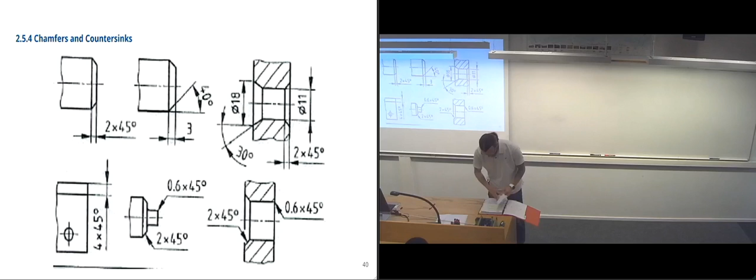So we left off with radii and diameters. We're going to continue on with chamfers and countersinks. Just got to find my place here in my notes. So there it is.

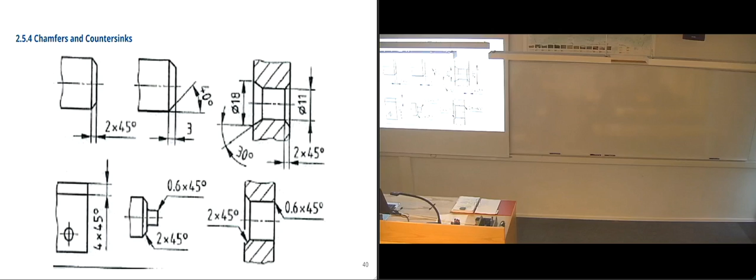Chamfers and countersinks. I'm not sure if you've heard these expressions before. Really, it just means you have made an angle on what would otherwise be a 90-degree angle. You have cut it so it's at a different angle. This means that, especially for smaller chamfers like this one, 0.6 millimeters times 45 degrees, what you are gaining by doing that is basically that you won't cut your fingers when handling it. Because a 90-degree angle on steel is going to be really sharp when machined. So often when machining, you will put in these small angles, or put a note in the drawing.

Break all sharp edges with a chamfer of maybe 0.2 times 45. That was what we used in Imenco, which was really nice, because if there was a 90-degree edge and we hadn't put in a specific chamfer for that edge, the guys manufacturing it would see the note and say, well, this one is going to have a 0.2 anyway. So they always did it.

When you have a 0.2, it is often more than enough to just use grinding paper or sandpaper to create the edge. So it's often a manual task. If it's a large one like this, 2 millimeters times 45, then it's turned. If it's in a lathe, it's turned with tools and machinery, or if it's in a mill, the mill will fix it. For the really small ones, it's often enough to just grind it a little bit to get that sharpness away from the edge.

When it's flush, then it will be... if we use red here to show the steel, the material will come up here, so that the top of the bolt will become the same level as the top of the material. Usually when you have a bolt, you have one with a hexagonal head, or maybe a round head, and then you will have the bolt head up here.

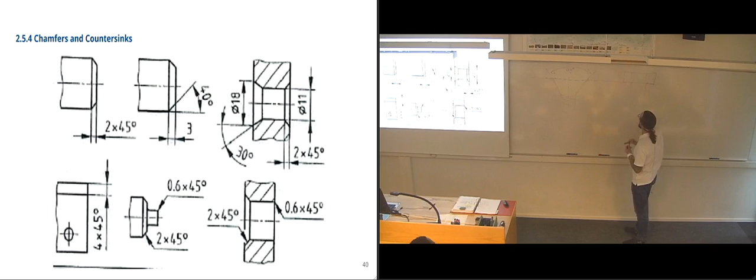Which means that in this case you will be able to slide something past here if there's supposed to be some movement. Whilst in this case it will stop because it will hit the bolt head, and you will either block your movement, or if the movement is strong enough, it will just tear the bolt head straight off.

So that's a very nice feature with the countersunk stuff. Also, for decorative purposes, if you're putting naming plates on a piece of equipment, with maybe some additional information like a workload limit stamped on the plate, it will make a much nicer plate if you use countersunk screws instead of ones that protrude out of the nameplate. It just looks much nicer when you're creating it.

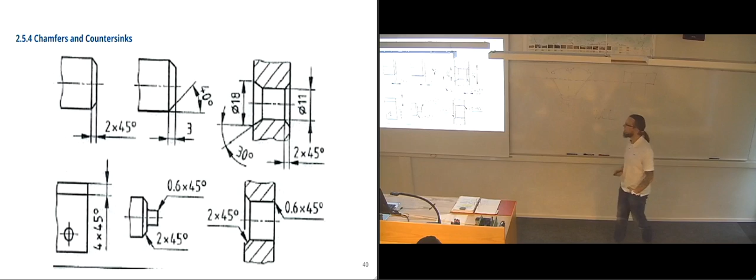Sometimes on cylinders you will have squares and flats, so you'll have a cylindrical shaft, but at the end of it you're supposed to connect it to something square. Maybe it's something that needs to turn, so it needs something to grip it on. So you will have these squares at the end in order to have something to grip onto the cylinder.

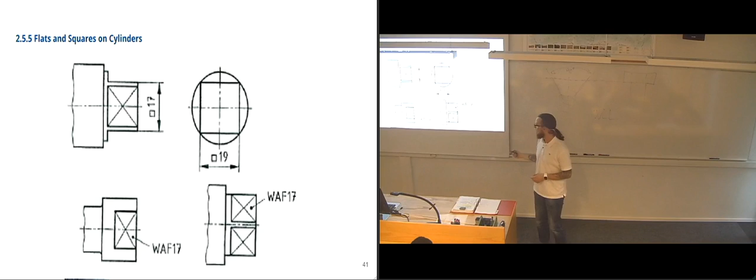You can also show it using width across flats, basically WAF. This shows that the entire flat area, which has these diagonals, will be 17 millimeters across. So it's a nice way of showing it.

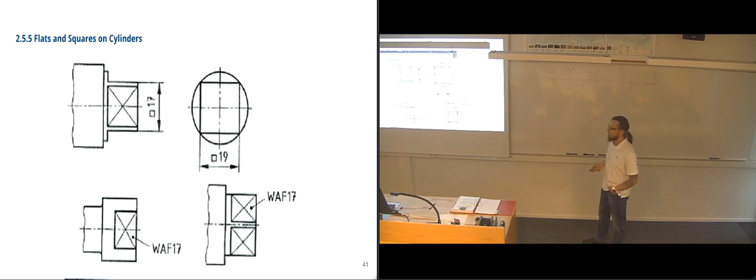I haven't really designed anything using squares, mainly because I haven't done much with rotating shafts. My personal experience is that usually you either use threads or some sort of spline method instead of these, but you might end up with them, so it's nice to know there's a way of drawing them.

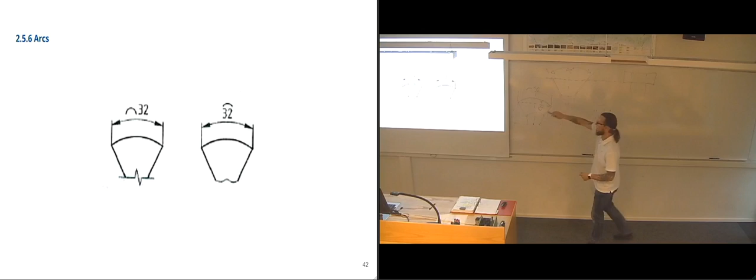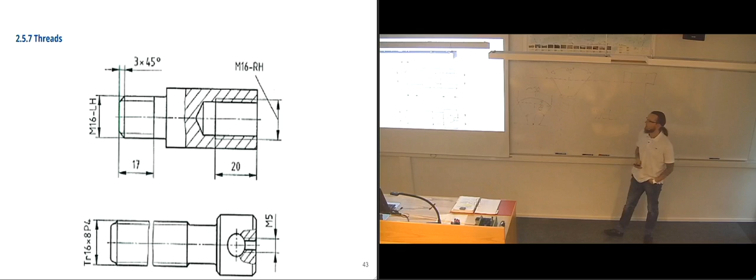And then we have threads, which is really important for mechanical engineers, because usually when you're making stuff stick together, you're either welding it or using threads so you can bolt it together. So threads are something very important to get correctly in drawings, just to be sure that the bolt you've designed to fit will actually fit. That's sometimes a huge problem.

I've seen a lot of different design errors done by colleagues and even myself, just because you've been in a hurry and haven't really thought it through. Then something seems good enough, but there was something you didn't think about. For example, if you just specify that a hole is to be 20 millimeters deep, instead of saying that the threaded part is 20 millimeters deep, and the hole itself is supposed to be even deeper.

What can end up happening is that when they create threads in holes, they don't manage to get the threads all the way in. Let me try to draw this. So you have the bottom of the hole, and this is the point of the drill when you're drilling it in. The drill has a certain angle when it's going in, so that's the bottom of the hole. From this line on, it will have the same diameter all the way.

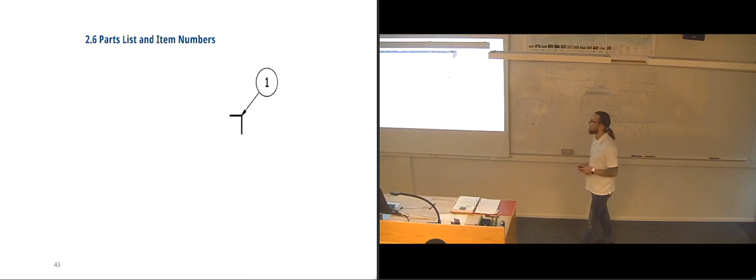He will take you through the different kinds of threads. But we'll also look a bit at the design, and when we get into Inventor, I'll show you how it works with the spiraling groove and everything. I think it's a nice complement to what he's doing, drawing everything on the whiteboard, which can get confusing with a lot of threads. If I can, I'll get him to tell me when you're doing threads in your lectures, and I'll supplement it in the CAD lectures.

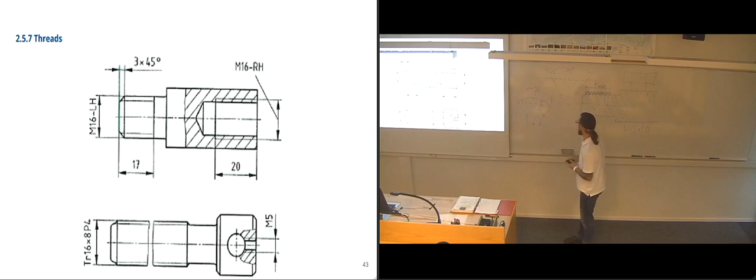I'm actually going to show you the 3D models and how it looks, so it's a bit easier to get a feeling of what's happening, because it's difficult to get across on a whiteboard. I know, because I tried to do it with the Norwegian students this spring, and it was really hard to get it across.

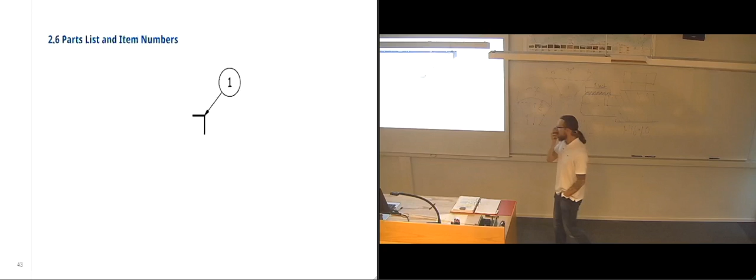In the drawings, we're not only drawing one part on each drawing. When you're creating a production drawing for a specific part, it's only that part in the drawing, because that's the drawing they are going to look at when they produce it.

But once you've created all the individual parts, you're going to assemble them together. A mechanic or technician needs a sort of guide, so you create an assembly drawing with all the parts assembled together, shown by item numbers.

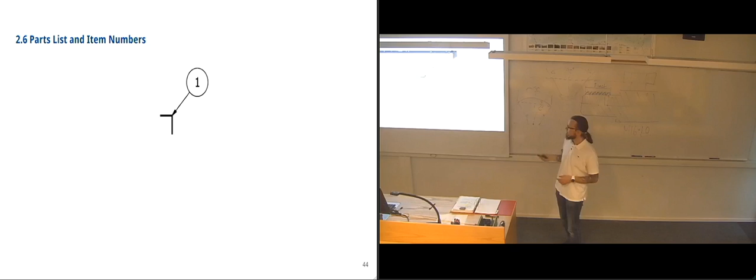You create balloons that point to each individual part, and the number in the balloon corresponds to the item number on a parts list, which you also add into the drawing, usually on top of the title block. So you have the sheet, the title block in the corner, and you add the parts list above it, gathering all your text in one corner.

The parts list usually has the item number, corresponding to the balloon in the drawing, and a quantity, so it's only necessary to put the balloon on one item, unless it's a cluttered drawing where it might be necessary to put balloons on several to avoid confusion. It should only be necessary to put one balloon per item, because you have a quantity showing how many there are. For example, if you have 16 bolts fastening something, you'd have item 1 pointing to one bolt, with quantity 16.

Then you'd see the pattern of the bolts, so you'd know - you could even count them - yeah, there are 16 bolts, so all of these are supposed to be that bolt. But the problem is, if you have 16 of one kind of bolt, 4 of another, and 12 of another, and they're all fairly similar in size and look similar in the drawing, then it might be nice to put more balloons, or one balloon with several arrows pointing to several bolts, just to make it clearer what's going on.

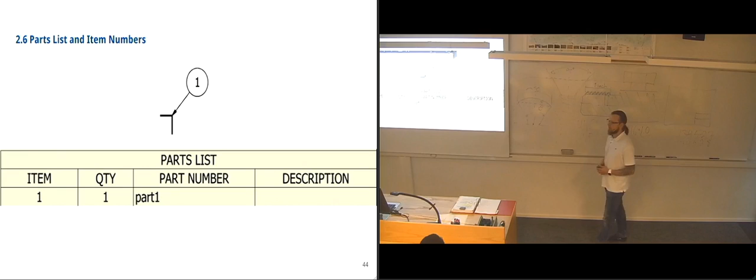So you have several ways of doing these part numbers, but it's very common to have it in that parts list. And then usually you also have a description - is it an M16 bolt? Is it a flange? Is it whatever it is? There's a description, the word or name of the item, which describes it.

The medium also gives for radii and chamfers, and it also gives for angles, how many degrees - actually, it gives it in degrees and minutes. And minutes is the sort of decimal point for degrees. I'm not sure how familiar you are with it, but degrees go in the same system as the clock does, in 60, counting in 60 all the time. That's why you have 360 degrees in a complete circle.

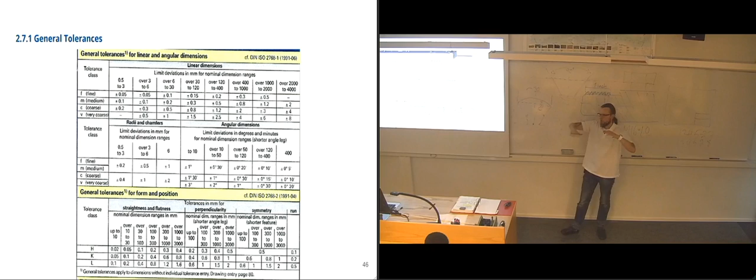So straightness and flatness is basically how straight and flat something should be. Could there be a slight curve in it? For an example, if you have been milling something, that's a really rough way of machining it. Let's say you're on an old milling machine, so it's got some give to it.

It's not completely reliable when it comes to dimensions yet. So maybe as it was moving across the workpiece, it would have a dip, so that in the middle of the workpiece you would have a slight curve, and then it would go back to the flatness of the original one. So then you can go in here and see.

For K here, you would have different values. You have the dimension range in millimeters, how far it is, and then you can see how much it is allowed to deviate. So the deviation would be, it was supposed to mill it like this, but it ended up milling it like this. The deviation would be the top point, just to see how much is allowed to deviate there.

The same with perpendicularity. It's 90 degrees. How perpendicular is this when you are looking at it? Is it within or above the tolerances given?

And what you actually do is measure on the shorter leg of the angle. So if I have a part, I've got a long leg of the angle here, and I've got a short leg here. And it's supposed to be 90 degrees in here.

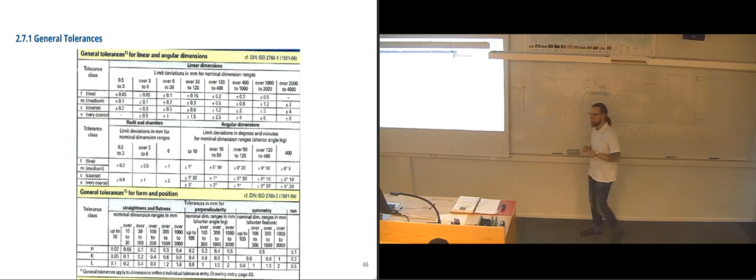It's an easier way of measuring it than actually measuring a 90 degree angle. Because if you're measuring it in how many degrees of an angle you have, it can be quite difficult, especially if you are doing it on small objects. The longer legs you have on the angle, the easier it will be to measure exact degrees on an angle. As soon as it starts becoming really small, it's harder to actually measure that.

You have 250 millimeters here, so if you continue this line up here, you were supposed to have 250 millimeters there also. So it's actually easier to measure the deviation in millimeters instead.

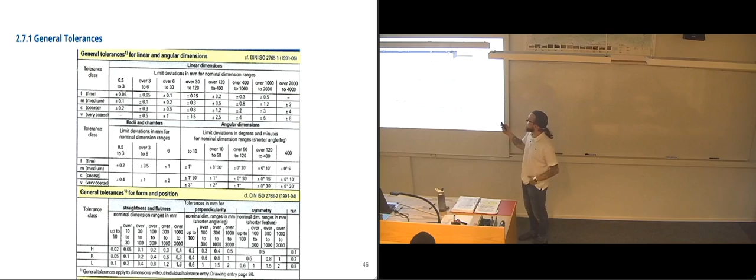So we've been looking at general tolerances that can be given. The thing is, if you refer your drawing to this ISO and you set it, for an example, medium and K, just to give the worker something to look at, then you don't need to put these tolerances into the dimensions in the drawing. If it is a 150 millimeter dimension, you don't need to put plus minus 0.5 behind it, because you have already referred to medium in this one. Everything that doesn't have a specific tolerance given will be referred to this one.

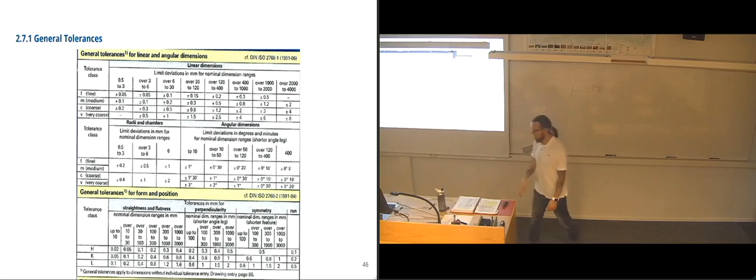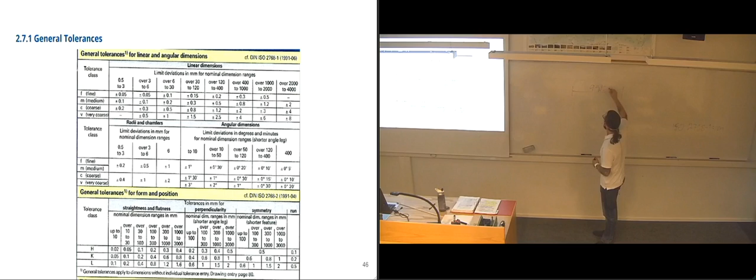So whoever is producing it will then look, maybe you have a length of 990 millimeters in your part, you have nothing behind it. So then the guy knows that you have, for example, in a note down here, written ISO 2768-1 and medium. So he will know that, well, 990 is below 1,000, so it's in here, so that is plus minus 0.8. So then he knows that it is plus minus 0.8 on this one.

So you don't actually have to put it in on every dimension, because putting in tolerances is a manual operation. After you put the dimension up, then you have to go in and put the tolerance in place. So if you can avoid putting tolerances on most of your dimensions, it is a lot better to just use referrals to a specific standard and a specific tolerance class, because then you don't have to do this on everyone.

However, if most of your drawing is supposed to be medium, but this specific dimension you would want to be fine instead, then you would have to go in manually, and you would put, let us see, plus minus 0.3. So then you would actually put in plus minus 0.3 in it. Because you are referring to medium, and medium would be plus minus 0.8, but for this specific dimension, you need something tighter, so you put in 0.3 in it.

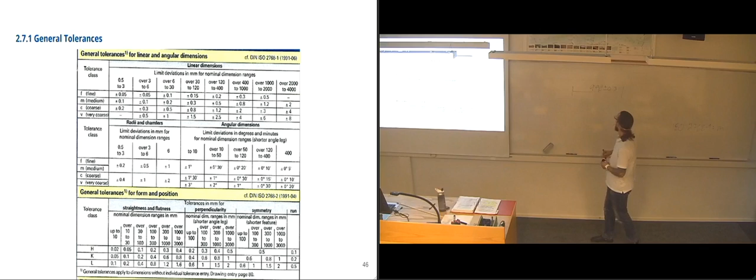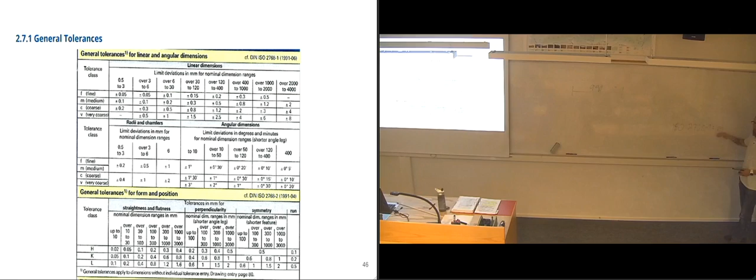One other possibility is that you can shift the tolerances, so instead of having a plus-minus range allowing 0.3 below and 0.3 above, you can shift it to be completely positive. So even though the medium tolerance here is plus-minus 0.8, you might want it on the positive side. So you'd set it as 0 plus 1.6, keeping the same range from minus 0.8 to plus 0.8, which is 1.6, but now going from 0 to 1.6 instead. You've shifted it so it can't be anything less than the nominal value. That's another way of using tolerances.

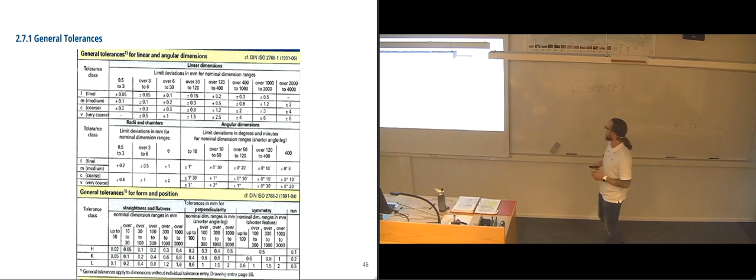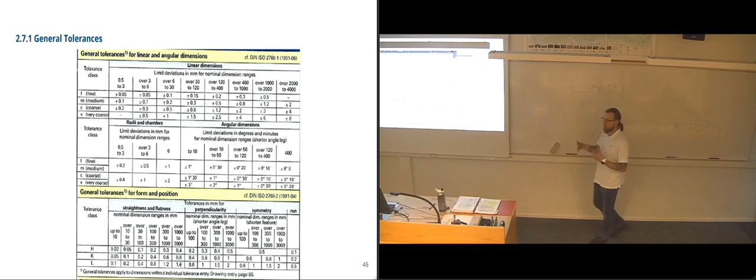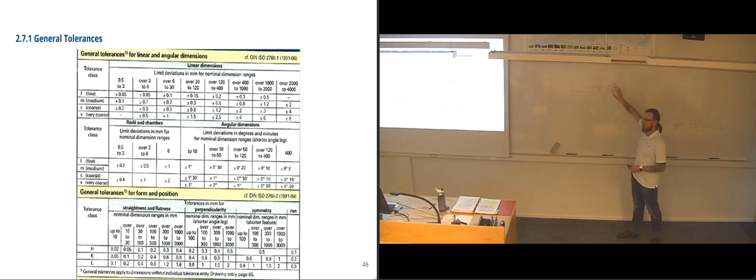Using tolerances is something that comes with experience, really. I'll try to incorporate it into the practice test we're using, showing how it's possible to use tolerances. But the real learning happens when you start designing on your own and realize you have to do something with the tolerance here to avoid a collision when creating it.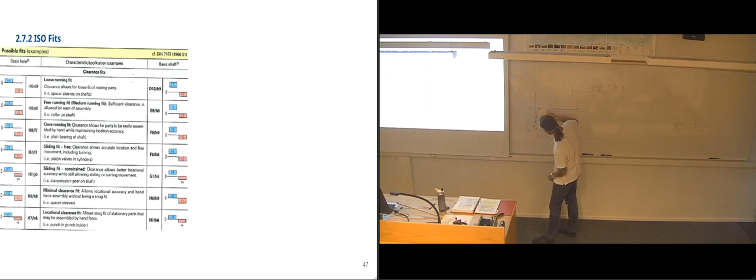Now for the shaft, let's see if I have a better red one here. The shaft is supposed to be inside here, and you can clearly see from the figure that it's far below—it's been shifted quite a bit down. So it goes from minus 0.025 to minus 0.050. So it can be quite a bit smaller than the hole in this case.

Instead of having to do all these dimensions and tolerances, going into tables and figuring out exactly what it is, writing in all these numbers, we can just put in the nominal dimension we're supposed to have, 30 millimeters in diameter, and designate F7 on it. That will automatically give it this tolerance, and the same goes for the hole.

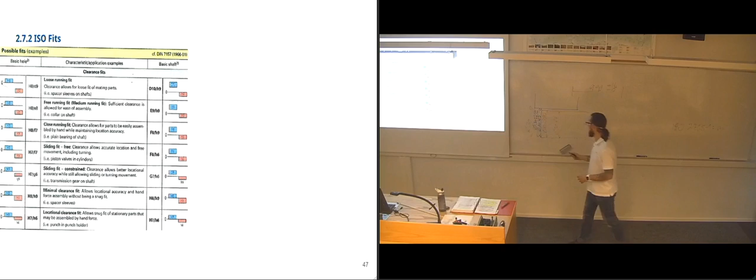30 millimeters, and we designated H7 there. Just write in H7, and then we get the correct one. Whoever is manufacturing it will have these tables with the corresponding tolerances for F7 and H7 and everything. They will have that with them in the workshop. So it's completely fair to just write 30 F7 on it. That's not a problem at all.

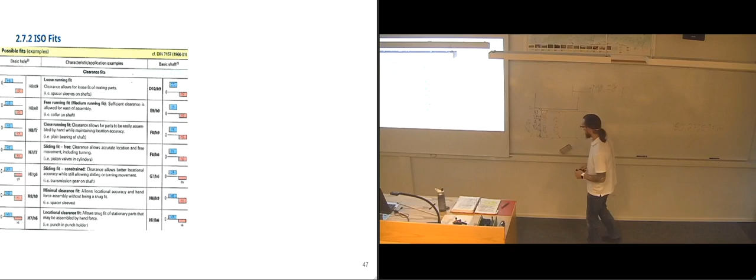What you can do, I'll show you later on in Inventor, is designate F7 as the tolerance, but you can also click the option that it's actually going to show the tolerance, so that you don't have to figure out the tolerance yourself. You just put in the F7, and Inventor will add what the exact tolerance will be and put it in for you in the drawing. That's one of the nice automation parts in Inventor.

The ISO fits are used because this first part, as it says up here, is clearance fits. Like this one, you are going to have air between the shaft and the wall of the hole, so that it's going to slide very easily inside there. There's not going to be any problems getting the shaft inside. When the tolerances are fairly tight, so if you have the minimal clearance fit, they can actually be touching on both sides. But you will still be able to slide it in if it's been manufactured correctly.

And then you have these transition fits. The clearance fits are mainly used if you have a movable part. If this shaft is going to rotate, then you usually use a clearance fit in some way. And then you also have the transition fits, which is sort of a cross - it's starting to be a collision between them, so they're starting to have a bit of trouble. Maybe you will have to use a hydraulic press to actually push the shaft into the hole, or maybe you will use the old-fashioned way with a sledgehammer, and just tap it in until you get it inside.

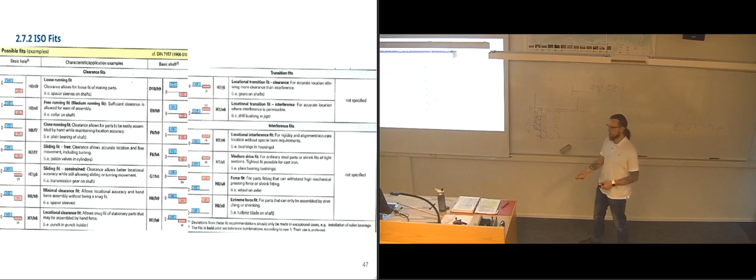In the car industry, what we usually did was that we had a CO2 tank under pressure, and when you release that, it gets really cold. So we just sprayed it with CO2 until it got cold enough. There was a lot of frost forming on the shaft and everything, and you had to have gloves to touch it, or else your skin would stick to the metal.

So when you get that cold, about minus 30, minus 40 degrees Celsius, then you had actually shrunk it enough that you could fit it inside the hole. And when it returned to room temperature, it would expand, and then it would be completely stuck inside the hole - you couldn't budge it at all. You would have to cool it down again if you were going to get it out. So that's a good way of getting them stuck without using welding or anything like that.

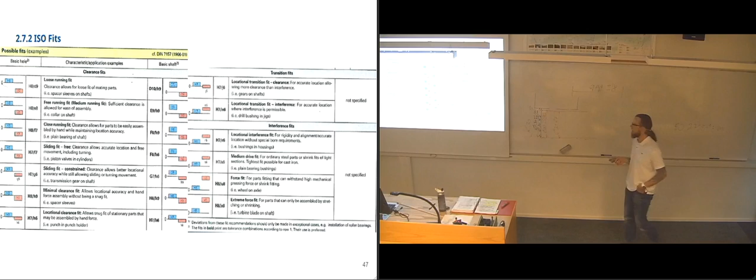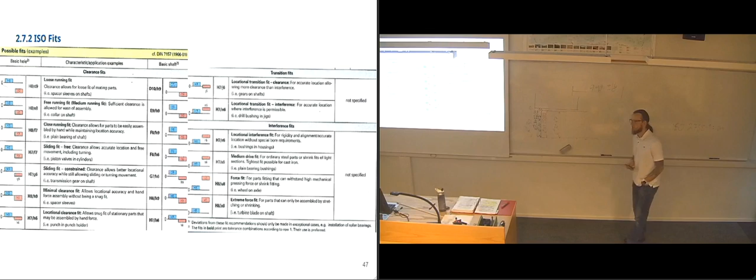It's something that's fairly much in use in the car industry. I haven't seen it much used in the subsea industry, but I haven't seen all of the subsea industry by far, so it might very well be areas where they use it.

And what you use the geometrical ones for is basically making stuff stay in place, not just by giving a dimension, but also by telling it to be, for example, concentric. If you have a hole...

If you have a shaft that's supposed to have a hole in the end, it's supposed to be exactly in center here, going fairly deep in, along the axis of the cylinder, and it's very important that it's exactly on there. You can use geometrical tolerances to state the importance of this. Because if you don't use a specific geometrical tolerance, it will be as exact as the machine can get it with the settings used to achieve all of the other tolerances.

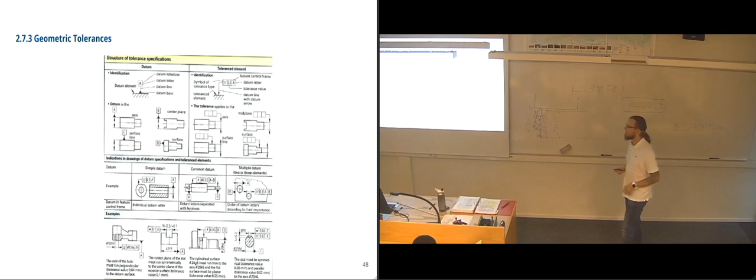Here are just some short examples. Like if you want two surfaces to be parallel. Perpendicularity, that they are exactly 90 degrees, or as exact as you can get it. Cylindricity you can show. Concentricity, that they have the same center line. Cylindricity, that it is actually a cylinder all the way through, that it hasn't been twisted along the way. Symmetry, that you have perfect symmetry around it, more than just using a symmetry line as we looked at yesterday. You would actually specify that this has to be really perfect symmetry, or as perfect as you can get it.

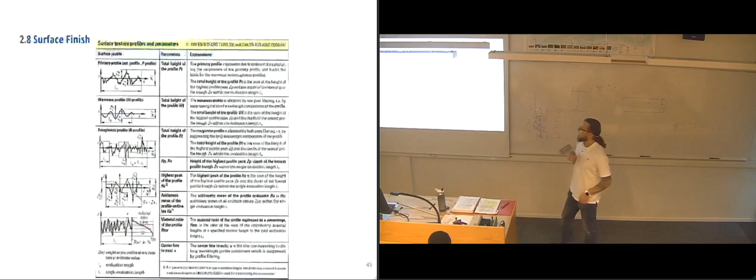Yeah, those are just a few quick examples. There are many of these tolerances that can be set.

And to my experience, most engineers that use them in their drawings manage to use them incorrectly. So they haven't really done their homework. They haven't read how they are supposed to use these symbols correctly, so when they put them on the drawing, they are putting them as they think they are supposed to be, but they haven't really confirmed it by reading the theory on how it's supposed to be used.

So if you end up in a situation where you think you need to use a geometrical tolerance, I would highly recommend that you sit down, take half an hour or so, and read up on this to refresh your memory on how a geometrical tolerance works exactly, how you're supposed to put it into your drawing, the symbols and everything, where they're supposed to be placed, in order to get it correctly. Because this is something you fairly seldom use, so every time you use it, it's useful to refresh your memory.

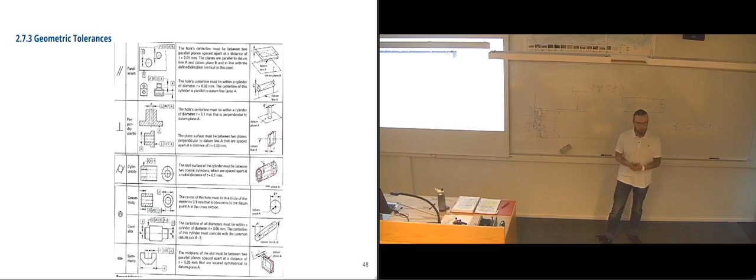Surface finish. When you're machining materials, you won't get a completely flat surface. If you go down to the microscopic level, it will look more or less like this, with valleys and peaks and everything, if you do a cut through it and put the microscope to the edge of it.

This is because, like if you are in a lathe turning a cylinder, the material is turning around like this, and you have a cutting tool moving along it, so it will cut a spiral groove all the way. But the blade isn't completely flat, if you look at the blade from the top, it looks more or less like this, with a rounded tip, so it will create spiral grooves that look almost like that along the entire length of the tool.

If you decrease the speed at which the tool is moving, you will of course create smaller and smaller grooves. So if you specify a very fine finish on your material, it means all of the tools used to create it have to move very slowly, so it will take a lot of time to achieve the surface you have specified.

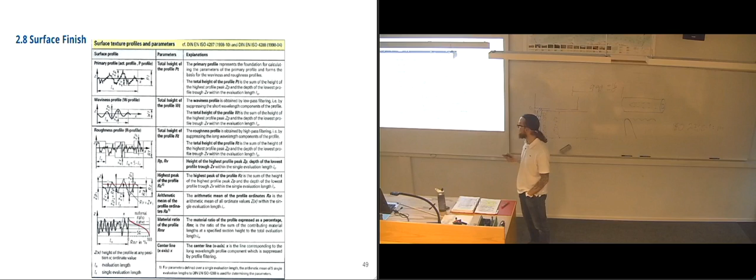One of the ways of specifying it on the drawing is to use the highest peak of the profile, or the arithmetic mean of the profile - RZ or RA. The RZ, which is the highest peak, simply designates the maximum height allowed between the mountain tops and valleys you have - the maximum difference in height. The arithmetic mean is basically just the mean value of the height of all the tops.

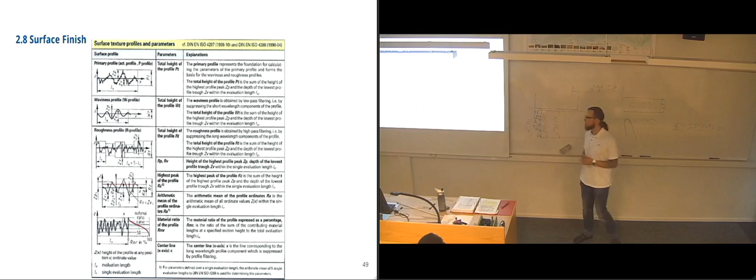Some people prefer using RZ, some prefer RA. It's not a huge problem, because you will be giving different numbers for them. It is a problem if you start to confuse them - you give the numbers for RA but have written RZ in front of it, because then you will have something completely different from what you intended. So long as you are consistent in what you're using, that's the best way of doing it.

The way we show surface finish is that we draw these symbols, which we have up here. There are 4 basic kinds of surface finish symbols, and the very basic one is this. This tip here is supposed to be in contact with the surface that you're specifying, but sometimes that's not quite possible, so you can also use an arrow to specify it.

The first one, which is completely open, means that all manufacturing processes are allowed. So it means you don't really care how they achieve the surface finish, so long as they deliver the correct surface finish. It's not your problem how they do it.

Sometimes you need them to remove material, so that even though the material is within the correct tolerance, they still have to remove a thin layer from it. This is often used, for example, with a huge steel plate you have bought to have a thickness of 5 millimeters, and you have also designated on the drawing that it's supposed to be 5 millimeters, but then you will have the surface finish coming directly from the mill, where they have treated it and created it - so you won't have a machined surface finish on it. So you can designate that they are going to remove material and have a specific surface finish on it, because then you will get a nicer surface. Even though the dimension is correct, they still have to run their milling machine across it.

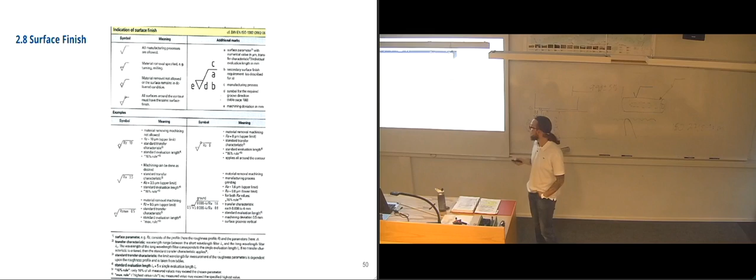So here you can see it can be as easy as doing one of these two. You just put in RZ and the value behind, or RA and the value behind. It can be that easy to designate it, and that's what's mostly being done. Or if you're doing something really special, you can start adding a whole load of information onto this symbol. But usually when it's getting that particular, it's nice to have a dialogue with whoever is going to machine it, so you know how they operate and how they interpret this when you're putting it in.

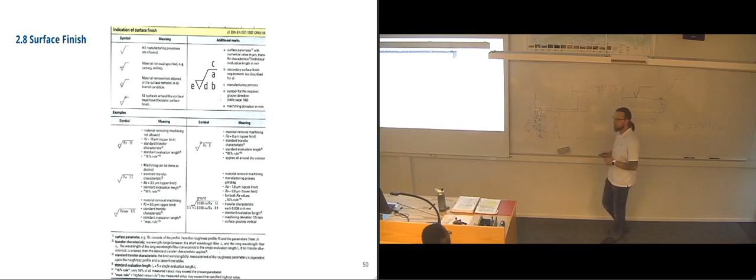That is one of the best tips I can give you, something that has taught me a lot: keep an open dialogue with whoever is producing the stuff that you're designing. Because they will come back and tell you that this tolerance fit you put in is going to become a bit loose, so maybe tighten it up a bit since they see what you're intending. Then I just revise my drawings, tighten up the ISO fit, and they go ahead and create it. It's a very useful synergy to have, to actually talk to the people that are producing the stuff.

Welding specifications also have their own symbols.

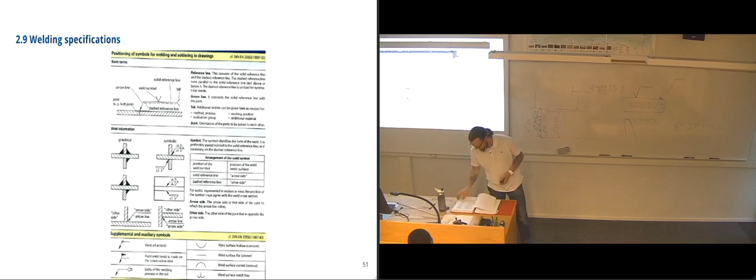So the welding symbol is fairly similar to the surface finish symbol. As you can see, you have the arrow going up here, and then you have some more information that you can add on top. You have the same stuff with the weld, where you can put a little circle on it to show that you're going to weld all the way around something, instead of putting several welding symbols to show that this goes all the way around.

You can put that circle on. At least here in Norway—I think most of the world uses it too—we use the A measurement when specifying the thickness of a weld. Torbjørn will take you into the specifics on how this works. I would digress completely if I start talking about that.

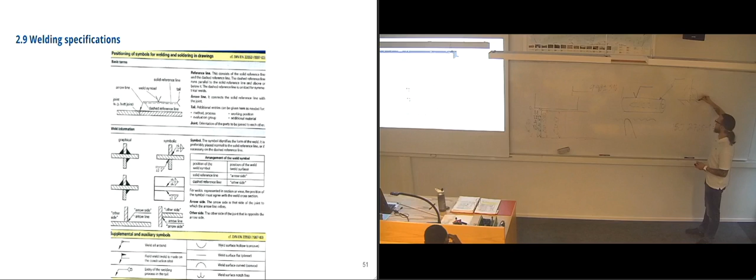You can also add some extra information on top of these triangles, like an arc showing if it's to be a concave surface—so when they weld it, you have the two plates, and it will often look like this afterwards, with a bulge if you cut it. But then they can go over it with a grinder and grind it down to become more flat. That's one way of showing it.

You can also put a flat line on top, and that means they will grind it, but they will only grind it until it is more or less a flat surface.

And then you can just allow it to be this bulge that it was from the start. And then you have the other one here, which means that the weld surface is notch-free, which means they have to pay particular attention that they get a very good weld all the way, so they can't have small bubbles where it hasn't been welded properly.

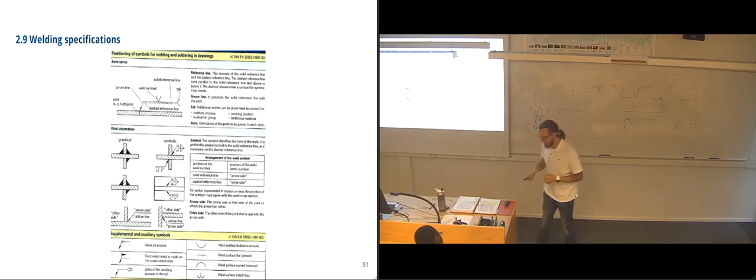Because those small areas where there isn't any weld material will actually be the weakest parts of the weld. So you can end up with the weld not being as strong as you specified if you have notches in it. But that's a bit up to you when doing your design calculations - are you using a very large safety factor?

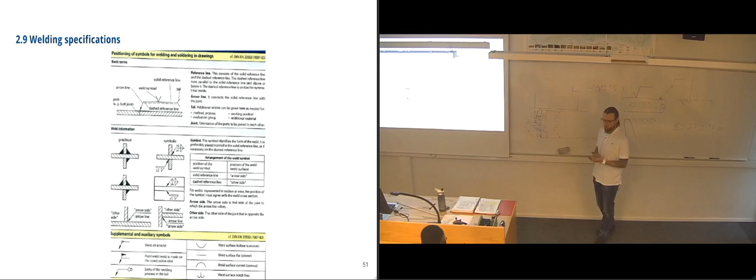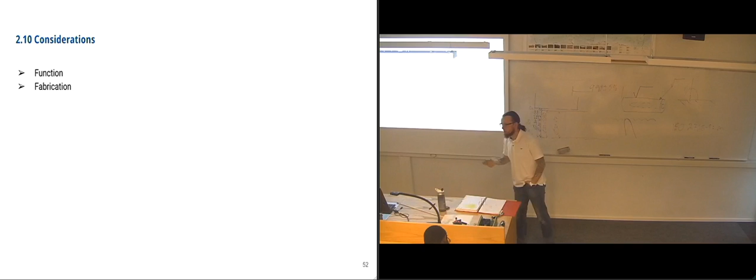Then it doesn't really matter how the weld looks as long as it has the correct thickness. So, considerations: we need to consider the function of the parts we are creating, how it's supposed to be fabricated or produced in the workshop, and quality control. Is it going to be easy to quality control the dimensions on this particular item, or should we redesign it a bit to make it easier to ensure the quality is upheld? Is it easy to interpret the drawing? That's something we really need to think about when creating drawings.

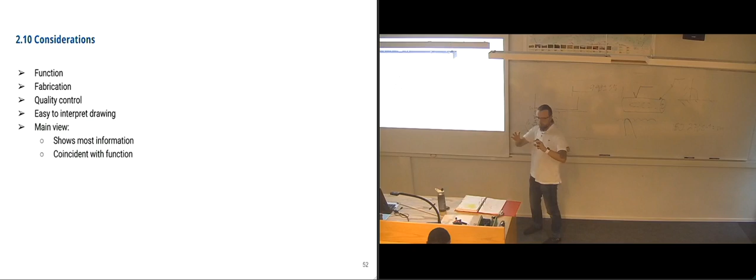For the main view of the drawing, it is supposed to show the most information. It's supposed to be coincident with the function of the item, so that the main view, which is the first one you choose on your drawing, shows what you would consider the front of the part - where you would look at it when using it, so it shows how it functions.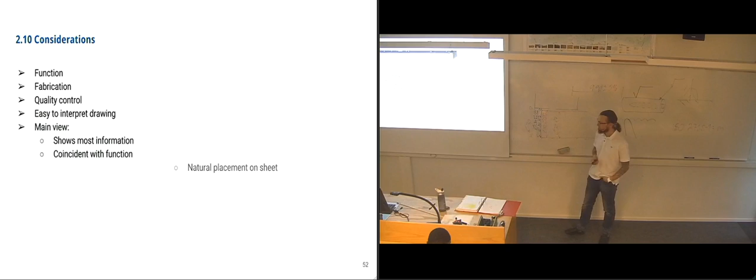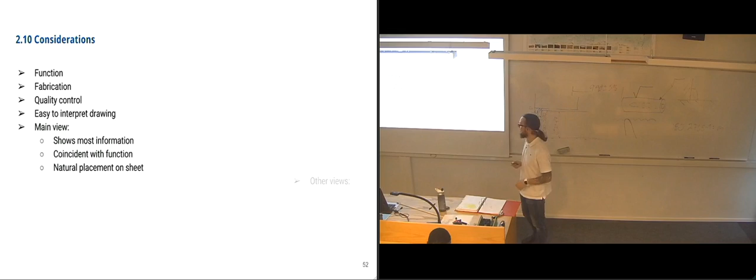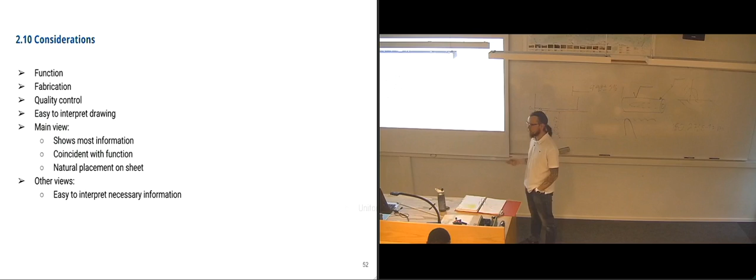We should try to place it naturally on the sheet so that the projected views get the correct locations. Other views that we use, like sections and detailed views, also need to be easy to interpret the necessary information you put into them. And there should be a uniform distance between all the views so you don't have a couple bunched up in a corner and then a huge open space to the next view - that looks pretty messy. Here is the drawing checklist that's on Fronter.

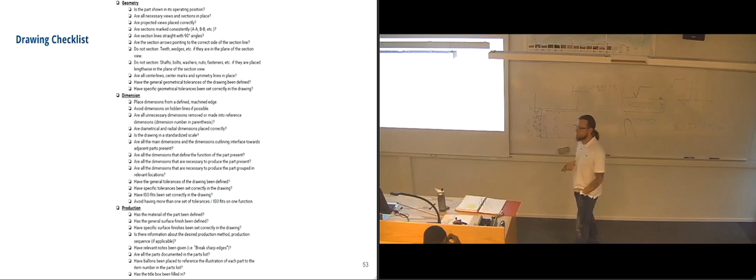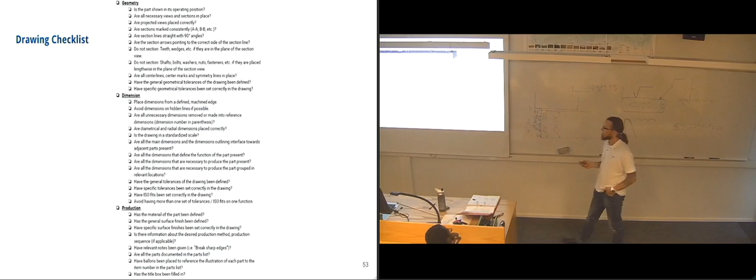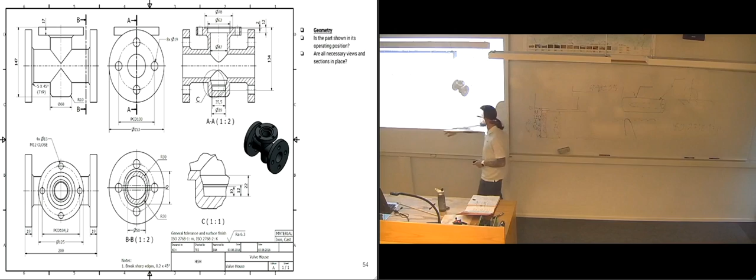Are all necessary views and sections in place? Well, we have the front view there. We've projected it over to this side so we can see the side and the flange. We've projected it downwards so we can see the top. We've also created a section B through here, just to show that the wall thickness is thinner on the sides than on the top, to show it's not completely cylindrical - it's more elliptical.

And we have a section going through here just to show the entire inner cavities of it. And down here there's a lot of details going on, so a detail view has been put in to get all of the dimensions in place.

Are projected views placed correctly? Yes, we have. Here we have the front view, and it's been tilted over to this side, so we're looking at it from that side. And it's been tilted down here, so we're looking at it from the top. So those projected views are placed correctly.

Are sections marked consistently? Sometimes, especially in Inventor, it will put these letters on automatically. But that means that if you put in a section here, that's your A section, and a section here, your B section, but then you figure out you weren't quite happy with the placement of that section, so you delete it and put up a new one here - then that one will suddenly be C instead of B.

And then the detail view will become D when you put that one in. So it's nice to check that you don't have any letters missing there, that you actually have A, B, C. Because if you suddenly go from A, C, D instead, whoever is reading the drawing will start wondering where is B, did I miss it? And then they might start wondering if there's a second sheet that I have to look at, is B on the second sheet instead? So it's nice to just keep it in alphabetical order.

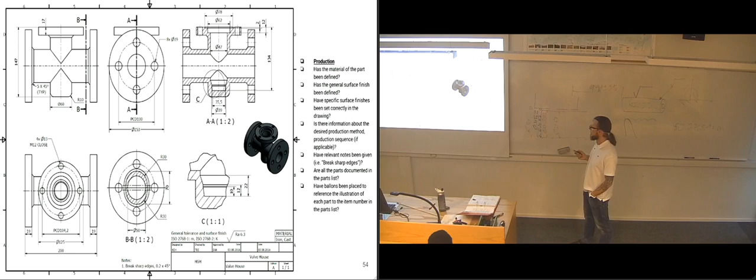Are all the parts documented in the parts list? Well, this is a single part, so we don't have a parts list for it. If it had been an assembly, we would have needed all the parts in there. Have balloons been placed to reference the illustration of each part to the item number in the parts list? Again, it's not an assembly, so we don't have that.

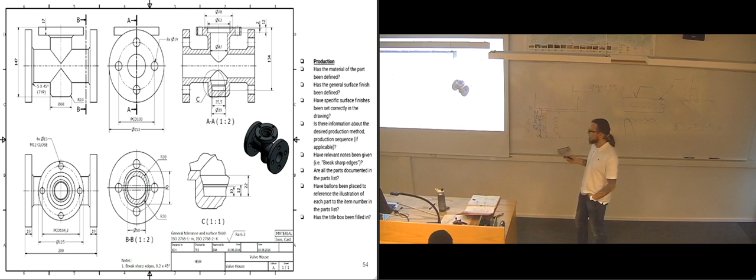Has the title box been filled in? Yes, we have me as the designer, Torbjörn as the checker, and Einar as the approver. It's been done here at the school. It's a valve house. I haven't given it any drawing name because we don't have a system for drawing names. It's the first edition, revision A, and we have 1 of 1 sheets - the 1 of 1 sheets part is automated.